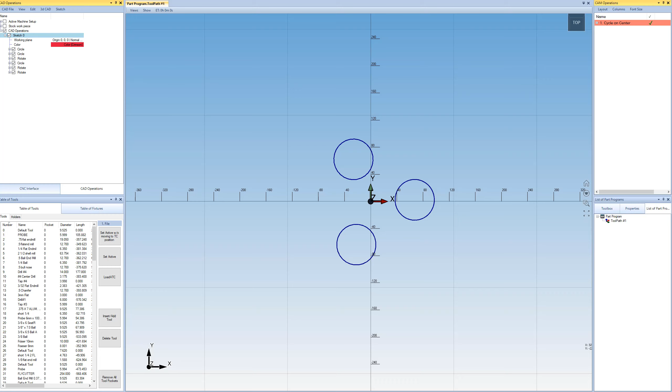In this video, I'm going to show how you can use a right angle drive to do work on the side of a part. In this case, we just want to cut out these three holes, but right now we're in the XY plane, and with the right angle drive we want to cut these holes in the YZ plane.

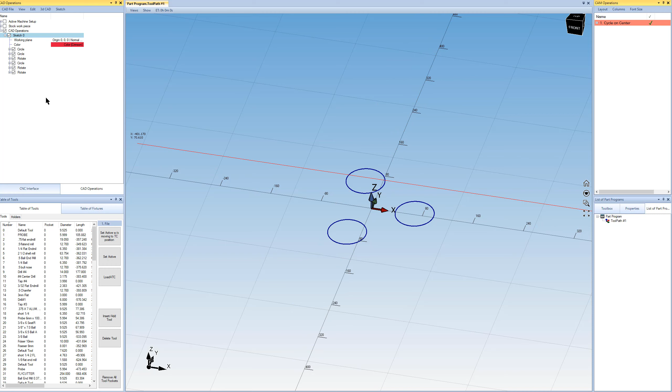The first thing I'm going to do is just turn my geometry into the YZ plane. That's really important to do. And the next thing I'm going to do is, I like to do everything in 3D.

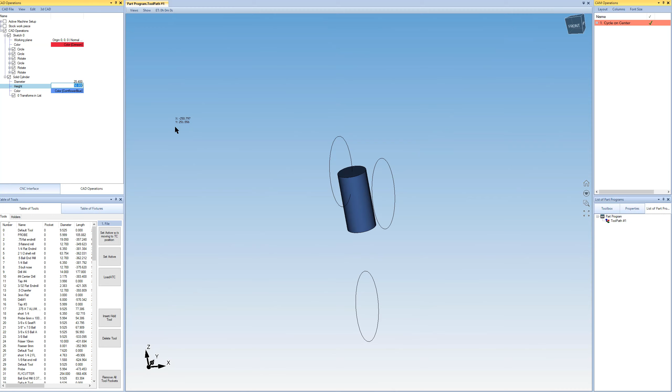So I'm going to come over here and make a cylinder, and make this a little bit bigger here. We'll go ahead and make this say 500 and 350. So there's a cylinder right there.

And the part that we're working on is kind of like, it's almost like a spindle on a machine tool or something, I'm not too sure. So we just want to machine a flat on the side and then drill these three holes. I think we're actually going to bore these three holes.

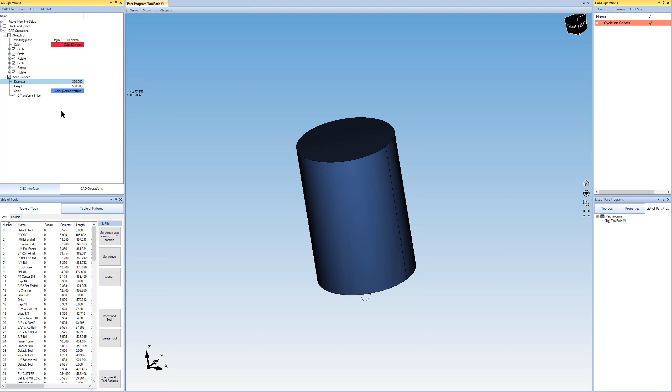Let's go ahead and place our cylinder down a little bit. We'll add an offset, and then we're just going to move it down in Z, like negative 250, and we'll go ahead and leave it in the center like this. So we just moved it down in Z.

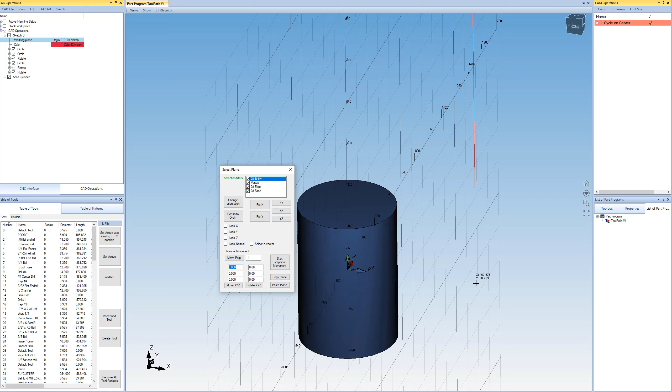Now let's go ahead and come back over here to the sketch, and we're going to move our three holes in the x-axis there. Let's go ahead and move it to say, let's do 150 millimeters.

I just paused the video there for a second and figured out that because we've already rotated our plane here, we're actually moving in Z because it's all relative to the plane that we're on. So we're going to move 150 millimeters in Z, and now you can see that our plane is kind of out over this way a little bit.

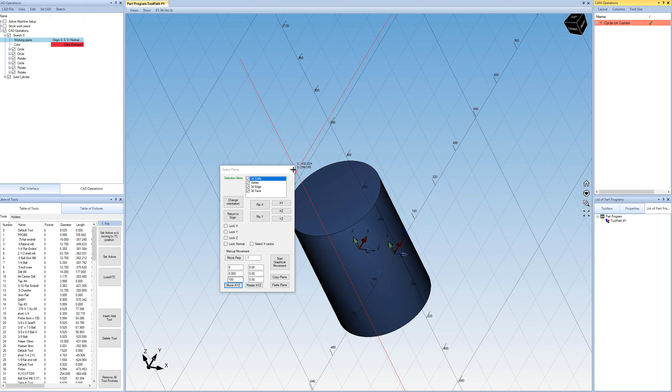So let's go ahead and just hide our cylinder here for a second. And I'm going to make a little box around our holes. So we're just going to create a rectangle, do a two-corner rectangle, something like that.

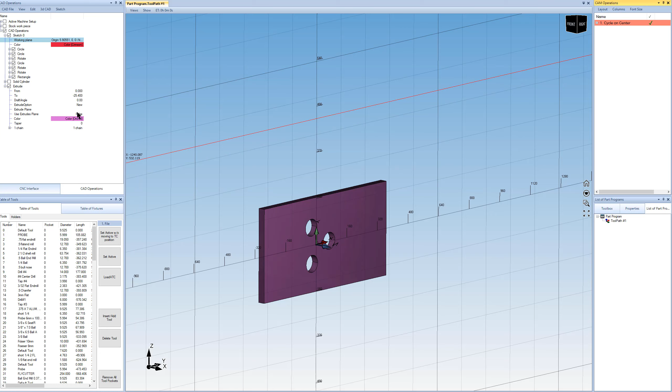Then I'm going to go ahead and extrude that. So I come over here and select extrude. I'll just grab that, and I'm going to tell it that we do not want to find these islands. Oops, no, leave it on new. So in the chain, we tell it we don't want to find the islands.

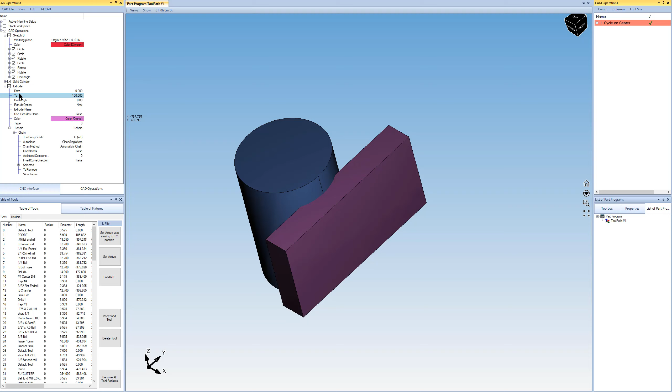So if I overlay that on top of our cylinder here, we can see we get something like that, and we're actually going to go up something like that. And then instead of extrude new, we're going to change it over to subtract. So then we get something kind of like that.

And I'm going to go ahead and change the from. We're going to drop it down into it a little bit. We'll go 25 millimeters into it, just so we have kind of a larger flat space there.

So now really our CAD geometry is ready to be used here.

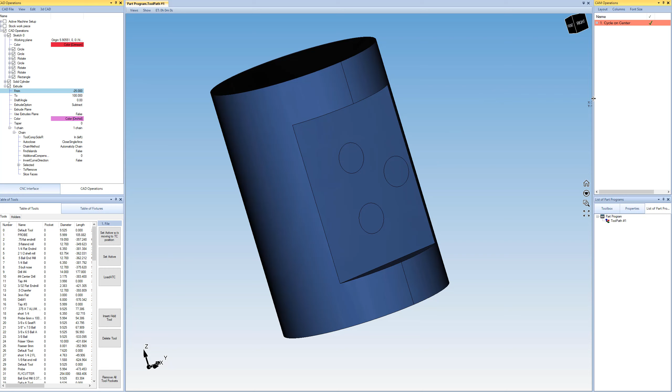So now we're going to come over here to our cycle on center. And since we have this oriented in the machine the way that it is right now, we're not going to change our working origin, right? Because our zero is going to be in the center of this. But we just want to work on those sides. So our working origin is going to stay the same, but our working face, that face that we're going to work on, is this face right here.

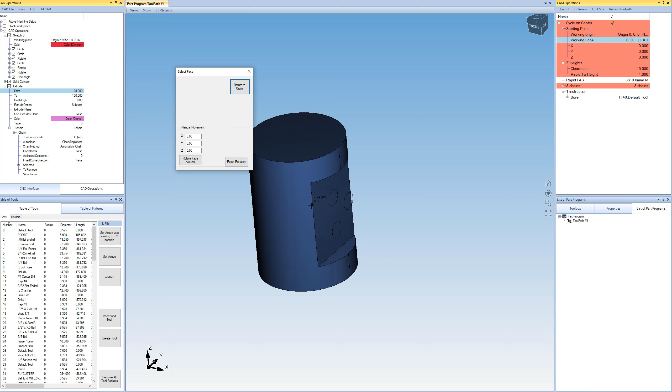So now, if I come over here and uncomment my cycle on center, you can see that the holes are in, we're going to drill, we're going to do these operations on these three holes here. And then I can also simulate that. I've got kind of a weird looking tool, but it is following exactly what we're looking for.

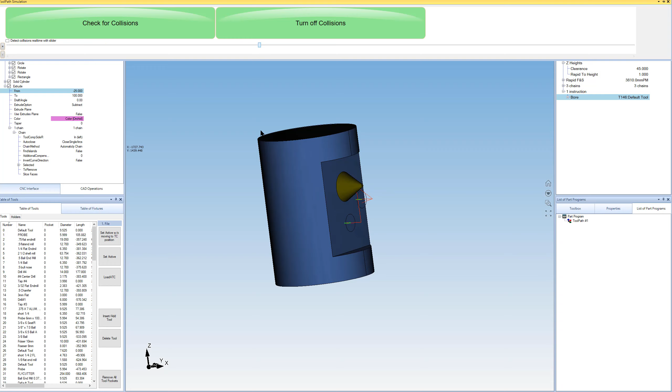So that would work, and that would just basically, instead of interpolating Z down like we normally would for a boring operation, it's going to interpolate X over and just bore out these three holes. Okay, hope that helps.